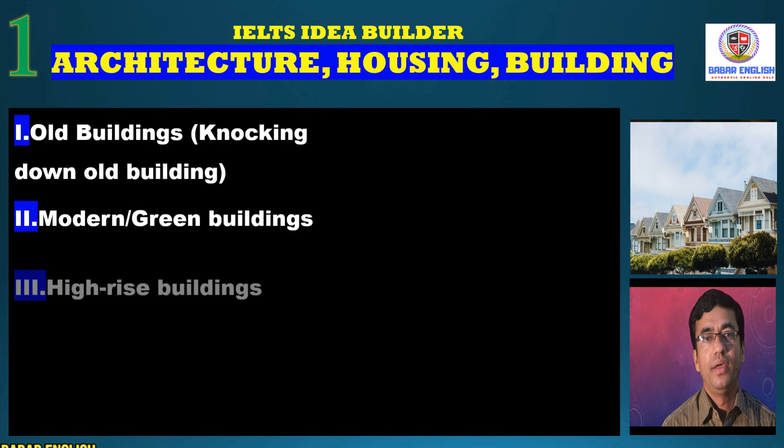Today our main topic is architecture, housing, building. Under this main topic we have got some subtopics. Our first subtopic is old building. Second subtopic is modern or green building. Third topic, high-rise building, and fourth topic, housing, and last, fifth topic is state housing.

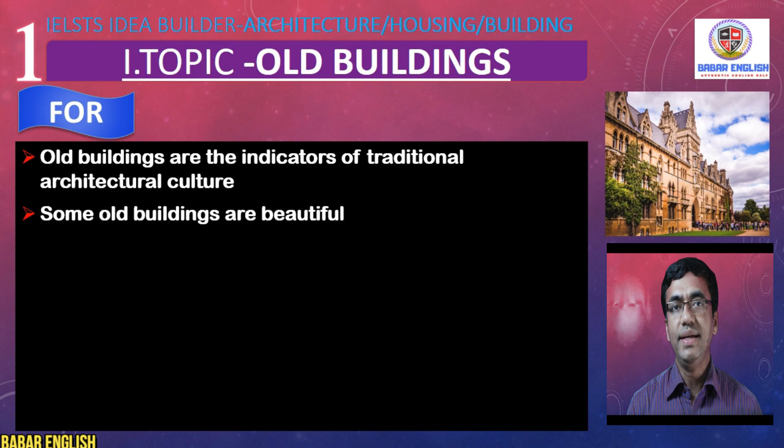Our first subtopic is old buildings. So at the very beginning, look at some positive sides of old buildings. Old buildings are the indicators of traditional architectural culture. Some old buildings are beautiful. Old buildings remind us of the glorious history of the past. Old buildings contribute to boosting tourism.

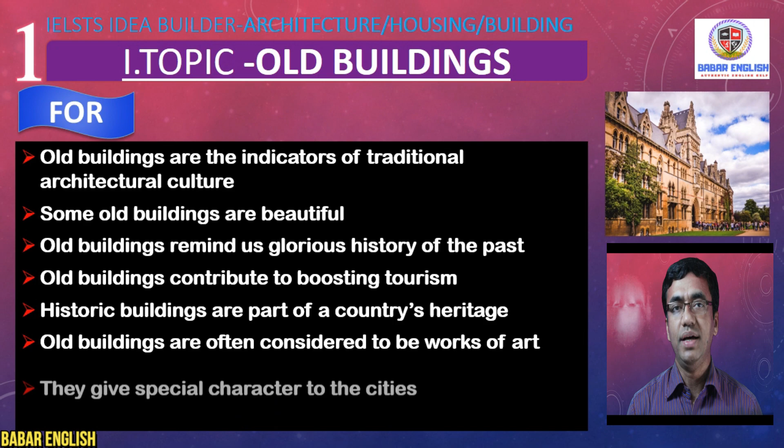Historic buildings are part of a country's heritage. Old buildings are often considered to be works of art. They give a special character to the cities.

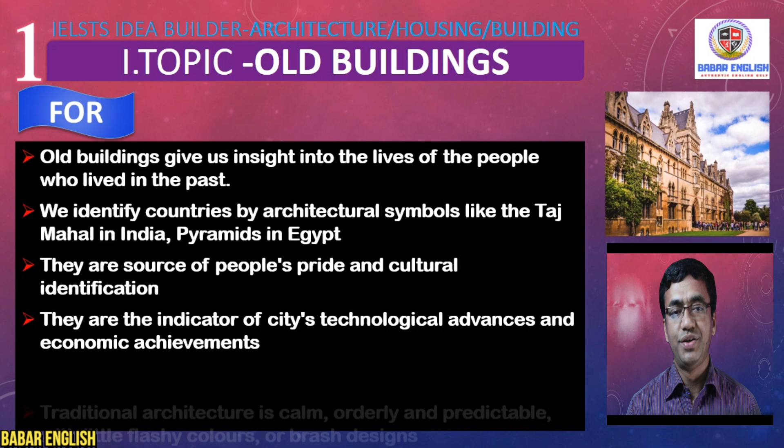Now look at some more positive sides of old buildings. Old buildings give us insight into the lives of the people who lived in the past. We identify countries by architectural symbols like the Taj Mahal in India, pyramids in Egypt. They are a source of people's pride and cultural identification. They are indicators of cities' technological advances and economic achievements. Traditional architecture is calm, orderly, and predictable.

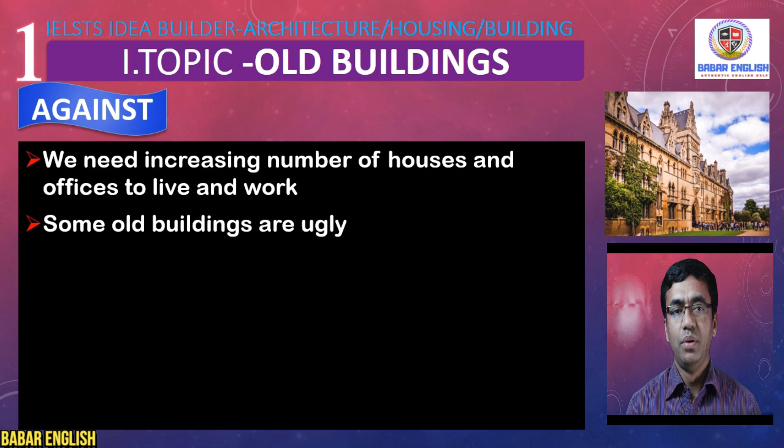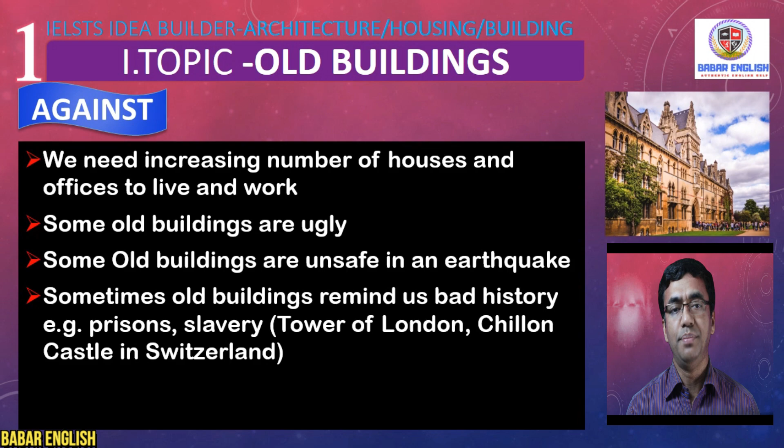Now look at some negative sides of old buildings. We need an increasing number of houses and offices to live and work. Some old buildings are ugly. Some old buildings are unsafe in earthquakes. Sometimes old buildings remind us of bad history, as for example, prisons or slavery.

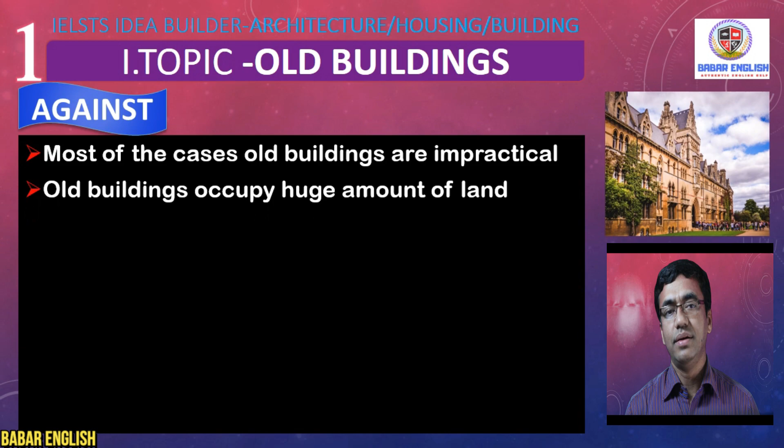Usually new buildings are practical. Most of the time, old buildings are impractical. Old buildings occupy a huge amount of land. Governments have to spend money on looking after historic buildings. They need regular repairs and maintenance. Contemporary designs are up to date, having the features of simplicity.

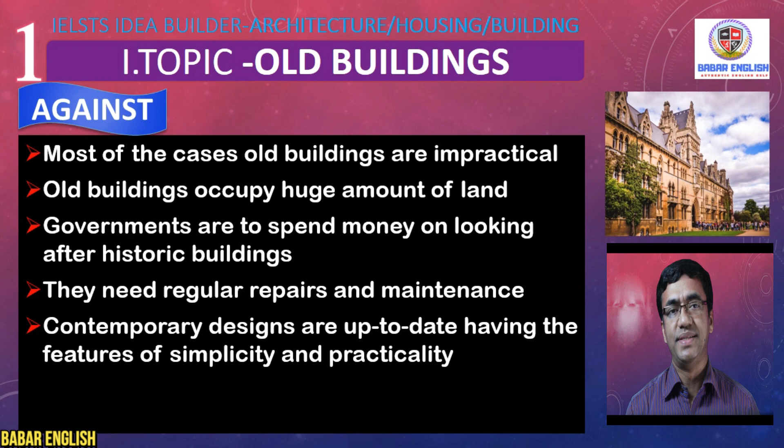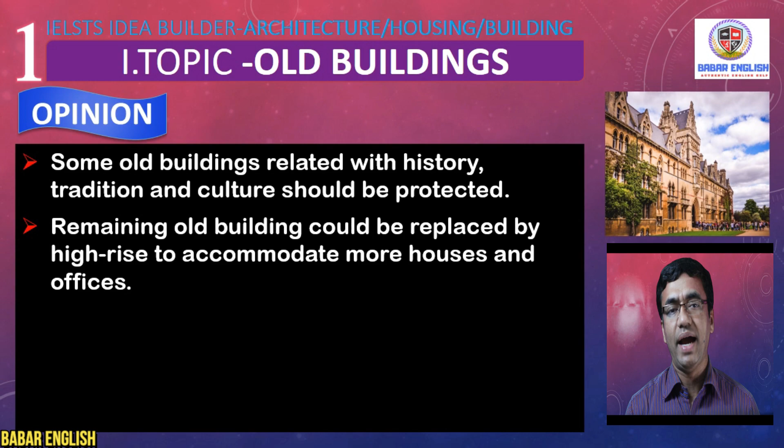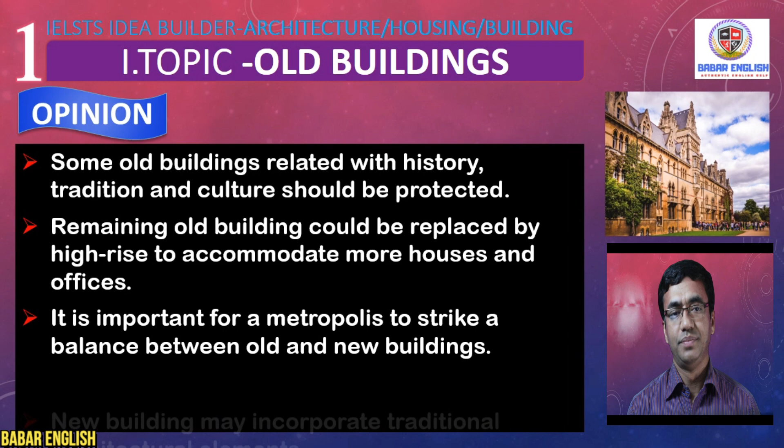Now look at some opinions about old buildings. Some of the buildings related with history, tradition, and culture should be protected. Remaining old buildings could be replaced by high-rise buildings to accommodate more houses and offices. It is important for a metropolis to strike a balance between old and new buildings. New buildings may incorporate traditional architectural design.

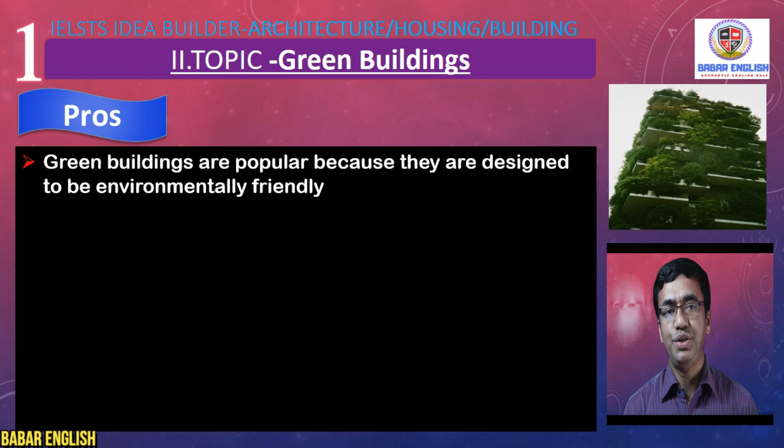Our next topic is green building. At the very beginning, we will look at some positive sides of green buildings. Green buildings are popular because they are designed to be environmentally friendly. Modern buildings have the features of automated ventilation control. They have high efficiency heating equipment.

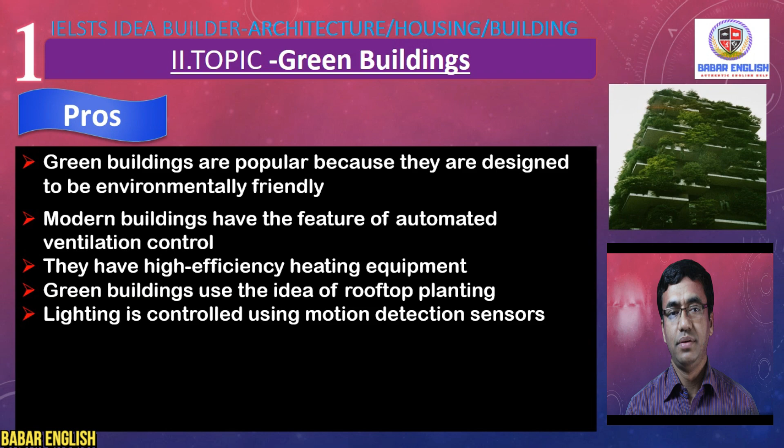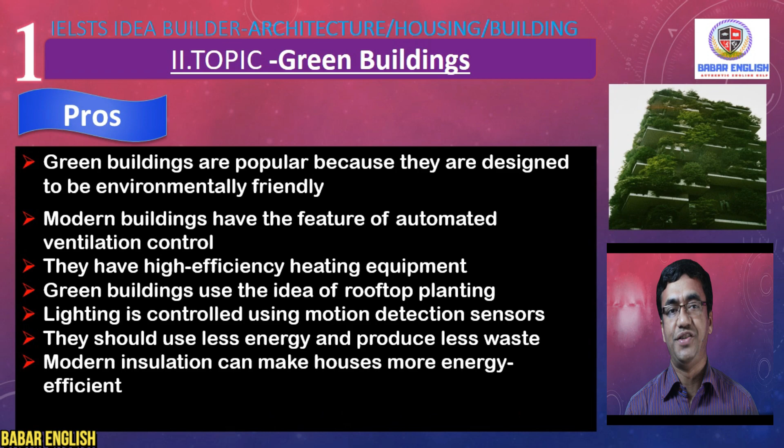Green buildings use the idea of rooftop planting. Lighting is controlled using motion detection sensors. They should use less energy and produce less waste. Modern insulation can make houses more energy efficient. Solar and wind power can be used to generate electricity.

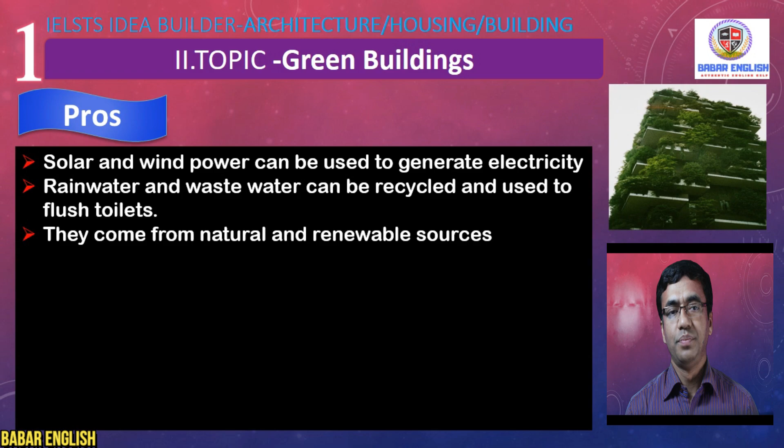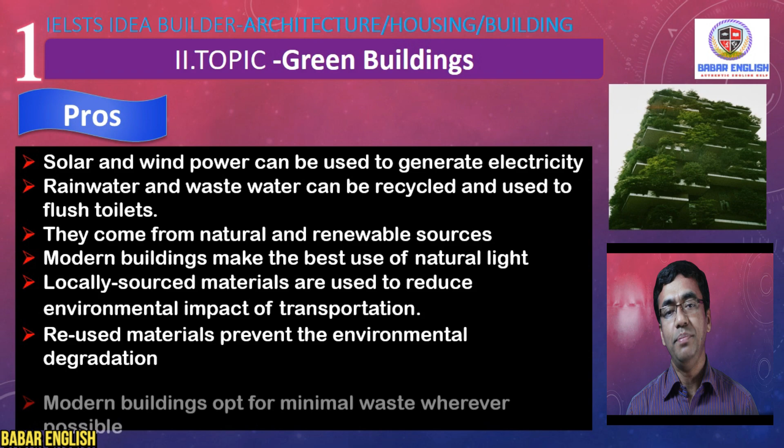Rainwater and wastewater can be recycled and used to flush toilets. They can come from natural and renewable sources. Modern buildings make the best use of natural lights. Locally sourced materials are used to reduce the environmental impact of transportation. Reused materials prevent environmental degradation. And modern buildings opt for minimal waste wherever possible.

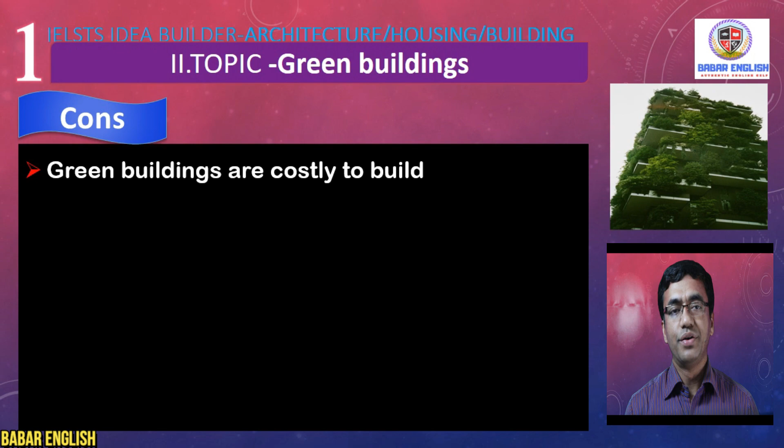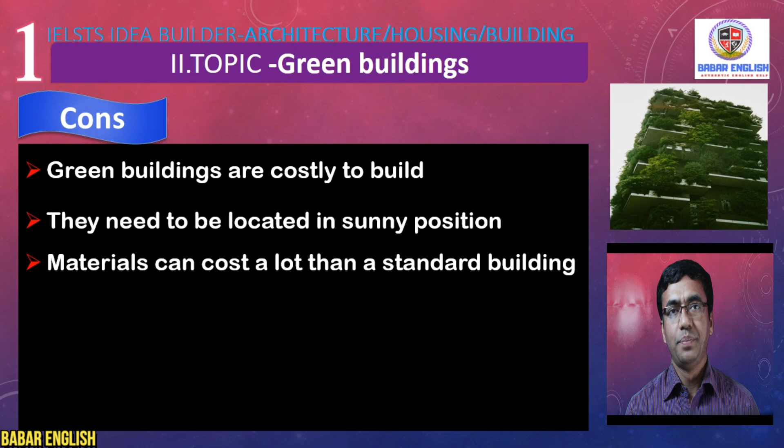Now we will talk about some negative sides of green buildings. At the very beginning, we can tell that green buildings are costly to build. They need to be located in a sunny position. Materials can cost a lot more than a standard building, making them more expensive than conventional buildings.

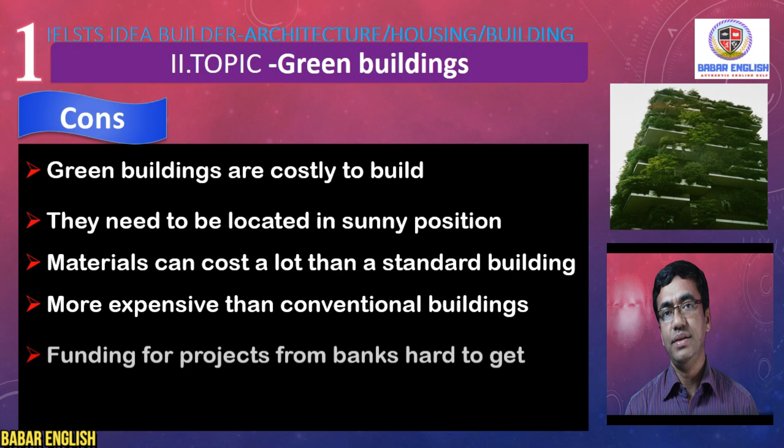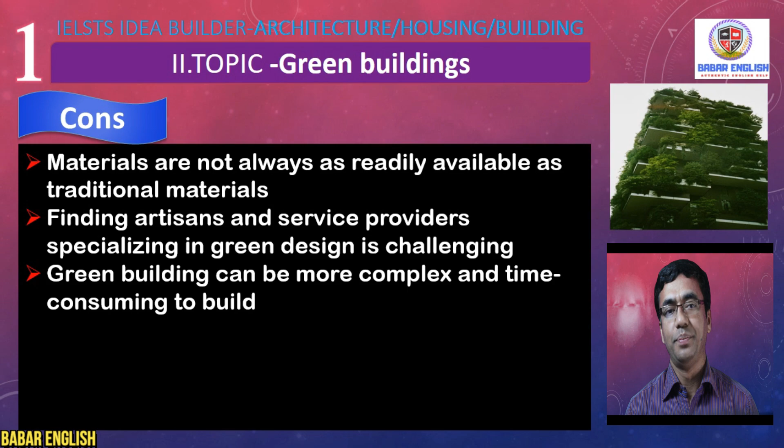Funding for projects from banks is very difficult to get. Materials are not always as readily available as traditional materials. Finding artisans and service providers specializing in green design is quite challenging. Green buildings can be more complex and time consuming to build. Homeowners don't have full control of the decrease or increase of the temperature.

Our next topic is high-rise buildings. At the very beginning, we'll see some advantages of high-rise buildings. In large cities, land is scarce and valuable. Tall buildings occupy only a small area of land, providing lots of floor space. Many high-rise buildings contribute to the area's vibrancy.

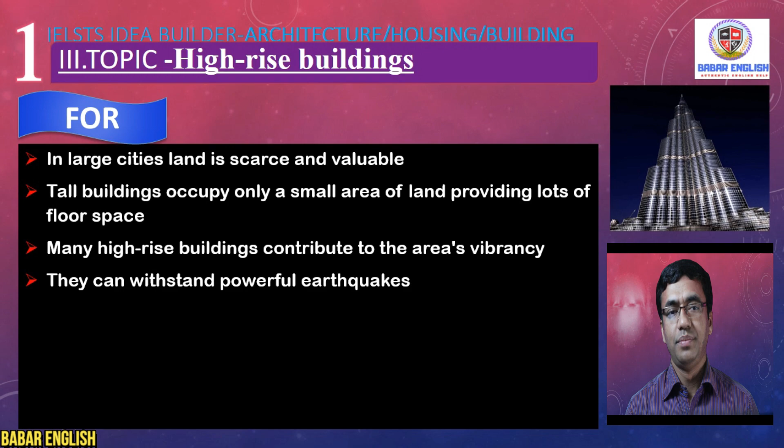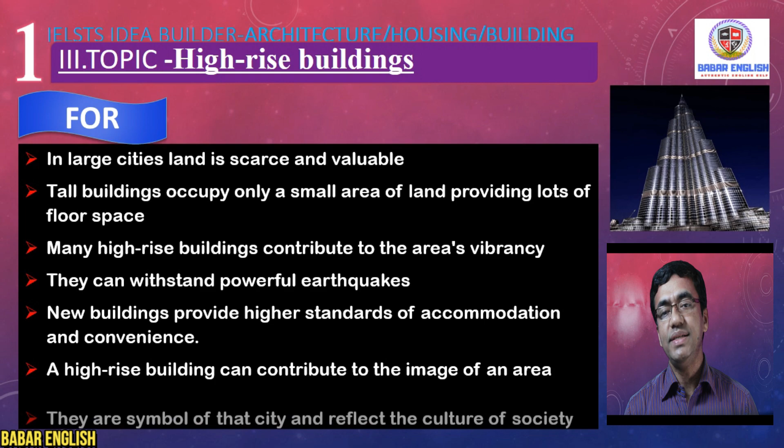They can withstand powerful earthquakes. New buildings provide higher standards of accommodation and convenience. A high-rise building can contribute to the image of an area. They are a symbol of that city and reflect the culture of the society.

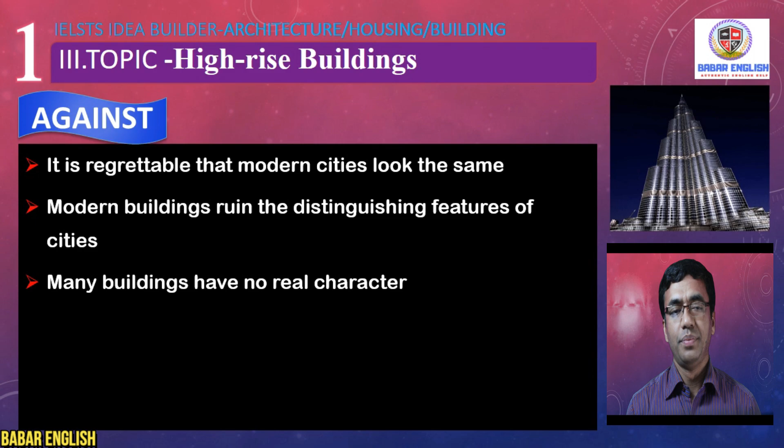Now we'll discuss the negative impact of high-rise buildings. It is regrettable that modern cities look the same. Modern buildings ruin the distinguishing features of a city. Many buildings have no real character at all. High-rise buildings ruin the view of natural features.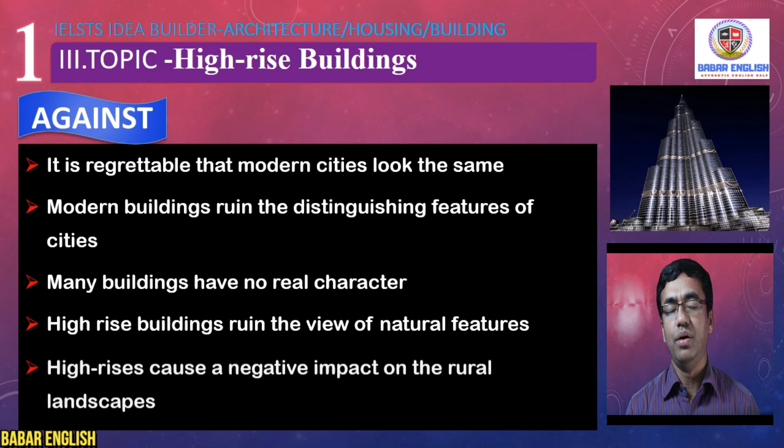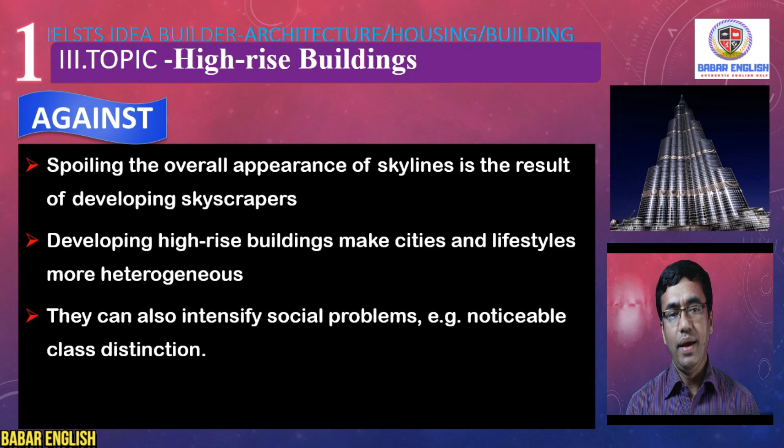High-rises cause a negative impact on the rural landscapes. Spoiling the overall appearance of skylines is the result of developing skyscrapers. Developing high-rise buildings makes cities and lifestyles more heterogeneous. They can also intensify social problems, and society standards may be sacrificed.

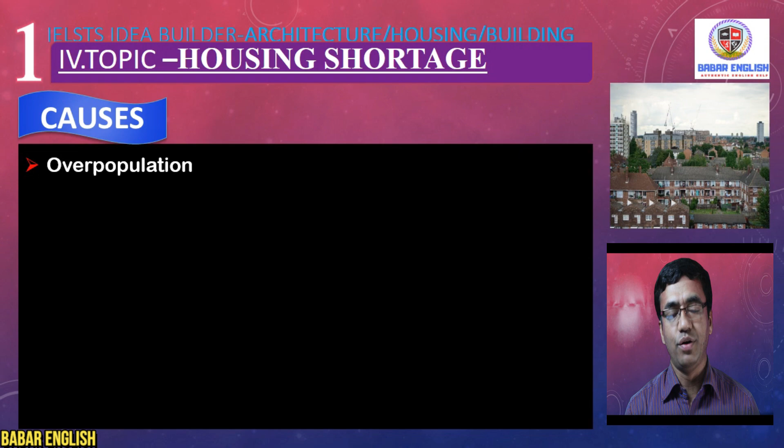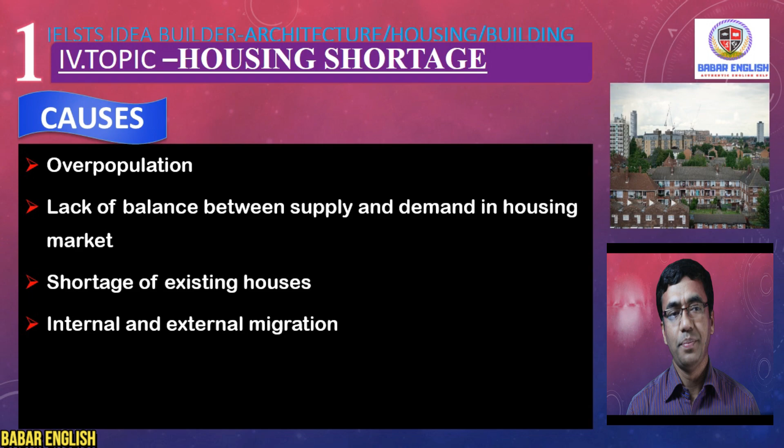Now we'll talk about housing shortage. There are some causes of housing shortage. Overpopulation is one of the main causes. Lack of balance between supply and demand in the housing market is another cause, along with shortage of existing houses. Internal and external migration also causes housing shortage. Centralization of official activities can cause housing scarcity.

Now, what is the solution to housing shortage? Let's look at some solutions. Affordable rental houses should be provided. Home ownership initiatives should be taken. Low-income families should be provided subsidized loans to assist people in meeting their housing needs. Government should introduce mass construction.

Now we'll talk about the advantages of state housing. There are some positive sides of houses given by the state or council. State housing helps people who can't afford to buy their own house. Governments construct buildings in a planned way. Council housing saves space in the city. Housing is one of the basic rights of citizens, so it should be provided by the government.

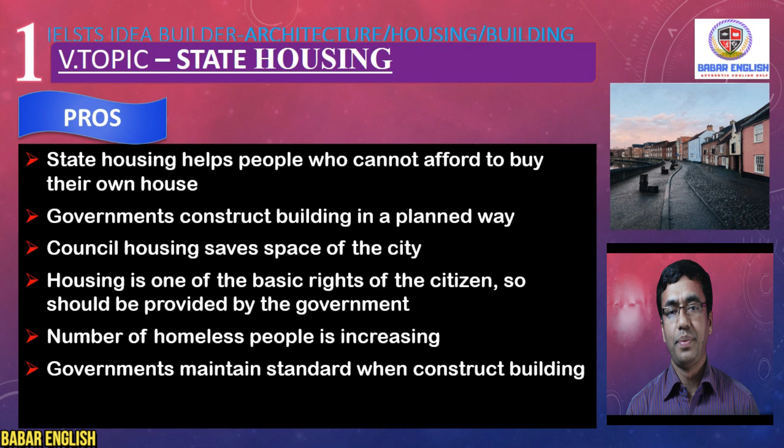The number of homeless people is increasing. Governments maintain a standard when constructing buildings. Government buildings add a special feature to a city.

Now look at some negative aspects of state housing. People become dependent on the government and have little personal choice. People have to rely on the government to look after them. Some people think state houses are often made with poor quality materials. People have no incentive to earn money and buy their own home. Most of the state houses are identical and boring.